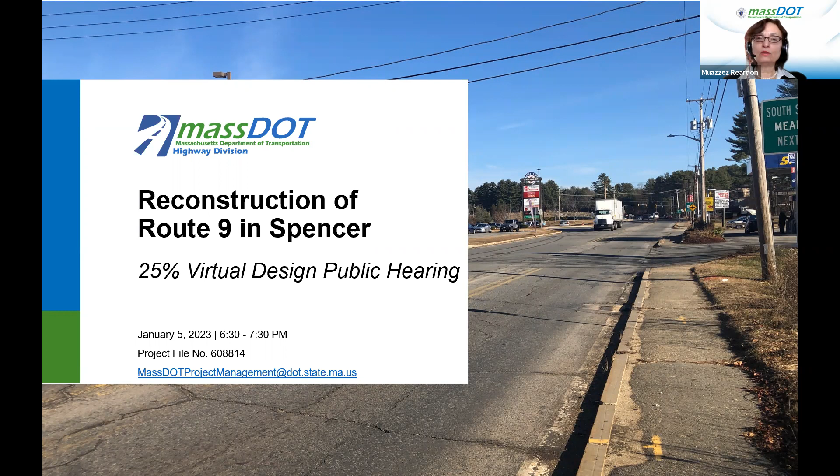The notice of the design public hearing appeared in the Telegram and Gazette on December 22nd, 2022 and December 29th, 2022, and the Stonebridge Press on December 23rd, 2022 and December 30th, 2022. A copy of this notice will be attached in the final hearing transcript. The hearing was advertised on MassDOT's social media. Notice and flyer also posted on MassDOT website on December 12th, 2022.

We are currently at the 25% design stage for the resurfacing and related work on Route 9 project, which means that the plans are still being developed and we welcome your feedback.

Estimated total project cost is about $10 million, which will come from federal aid funding with Federal Highway Administration funding 80% of the total construction cost. MassDOT funds the remaining 20%. This project must be programmed in the statewide transportation improvement program in the appropriate federal fiscal year in order for MassDOT to solicit bids for eventual construction. The total estimated cost of the project does not include any right-of-way acquisition costs.

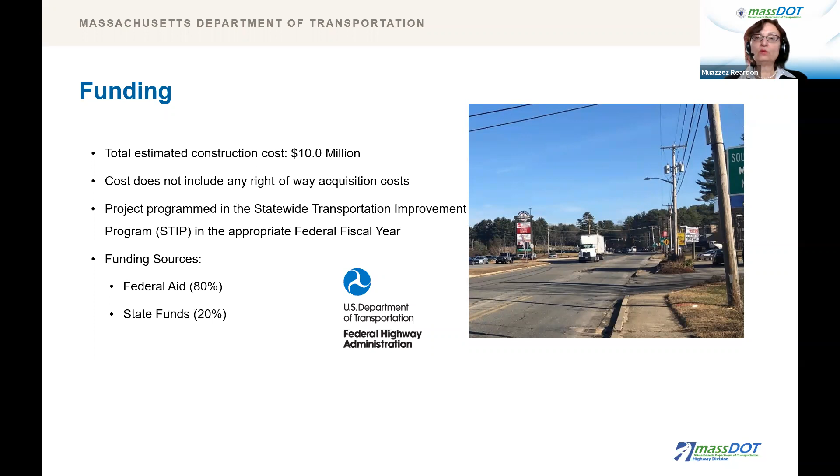The design is expected to be completed in the summer of 2024. Construction is expected to be completed within 24 months after the notice to proceed.

The project we will be presenting today is the resurfacing and related work on Route 9 project. This slide provides an overview of the topics that will be discussed during this presentation.

As you may be aware, the reason for the project is to improve existing roadway condition, reduce traffic congestion, complete missing links for pedestrians and bicycles, improve safety for all users, improve pavement markings and signage, improve existing pavement conditions, and improve stormwater collection and treatment.

Please keep in mind that the project we are presenting is still in the design stage. The plans are still being developed and we welcome your feedback. All your questions and comments will be taken into consideration as the project's design advances.

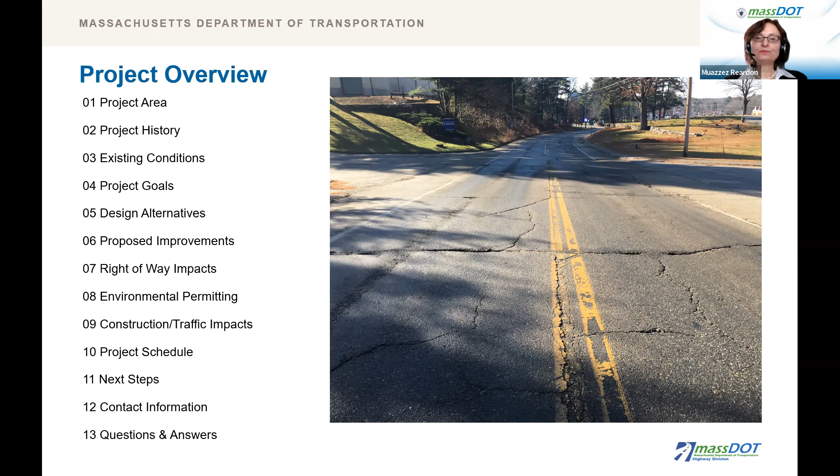Here we see the limits of the project. The project includes reconstruction of approximately 1 mile of Route 9 from just east of the Route 49 intersection to just west of the Water Street and Summer Street intersection.

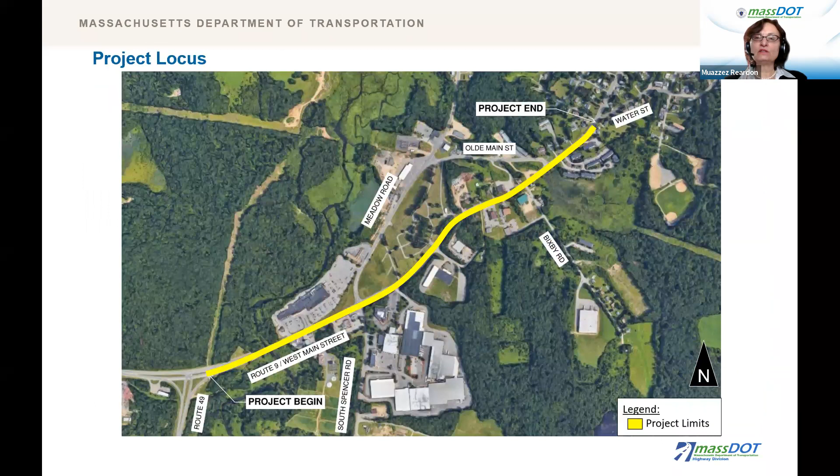The project was initiated in March of 2017 and approved by the MassDOT Project Review Committee within a month. The consultant completed an alternatives analysis in October of 2020. 25% design was submitted to MassDOT in August of 2021. Revised 25% design submitted to MassDOT in April of 2022, which brings us to the design public hearing tonight.

Now, Dimitrios Makos, District 3, will explain why this project was initiated. Thank you, Muazzez. Why was this project initiated?

This project was initiated to improve and upgrade multiple existing deficiencies identified throughout the project corridor. Here we have a list of the existing conditions and deficiencies that exist on this section of Route 9 that I will be talking about.

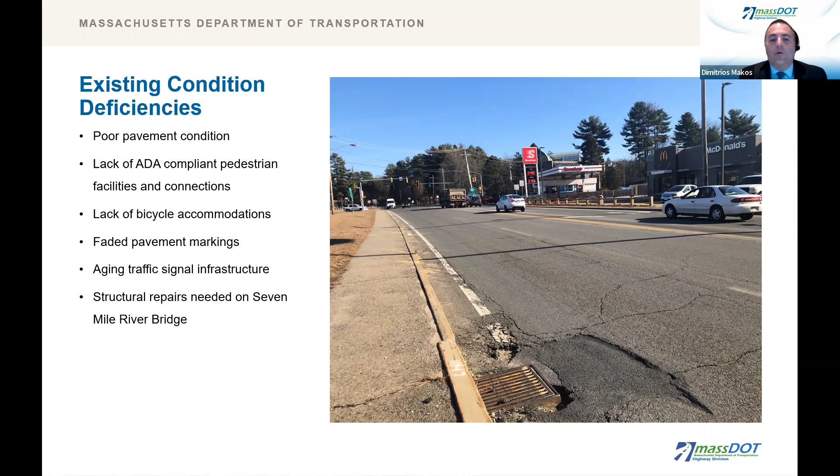The roadway pavement is in poor condition with large cracks in many areas. There is a lack of Americans with Disabilities Act, or ADA, compliant pedestrian facilities. Sections of the corridor, such as in front of the Spencer Fair Shopping Plaza, do not have a sidewalk. The existing pedestrian ramps do not meet ADA standards. There's also a lack of bicycle accommodations, specifically in the area of the Spencer Fair Shopping Plaza. Pavement markings are faded and signal equipment is outdated. Bridge inspection has shown that structural repairs are needed on the Seven Mile River Bridge.

In the picture on the left, we have an example of the large, deep cracks within the roadway which exists throughout the project corridor. The picture on the right shows the existing traffic signals at the intersection of Meadow Road and Route 9 that need updating. The traffic signal backplates have broken apart.

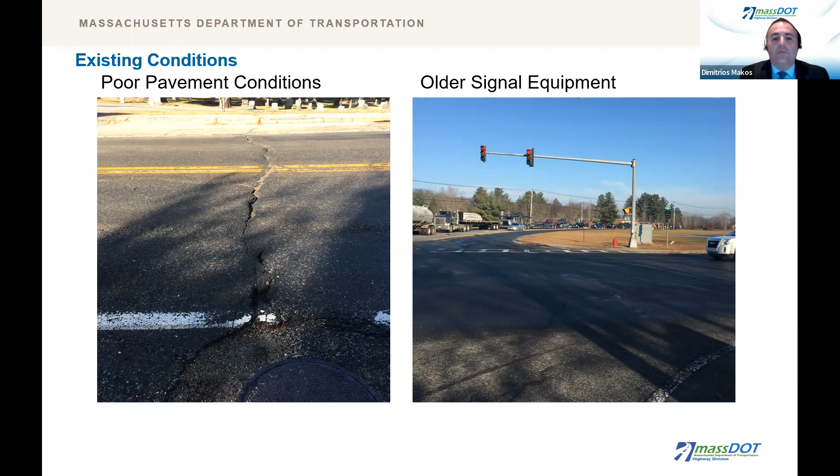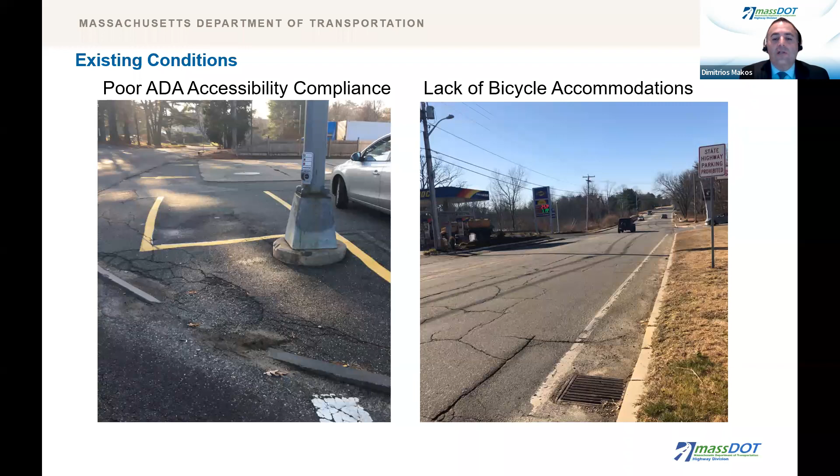The picture on the left is an example of a pedestrian ramp at the Route 9 and South Spencer Road intersection, which does not meet ADA accessibility standards. The picture on the right shows the lack of bicycle facilities in front of the Spencer Fair Shopping Plaza.

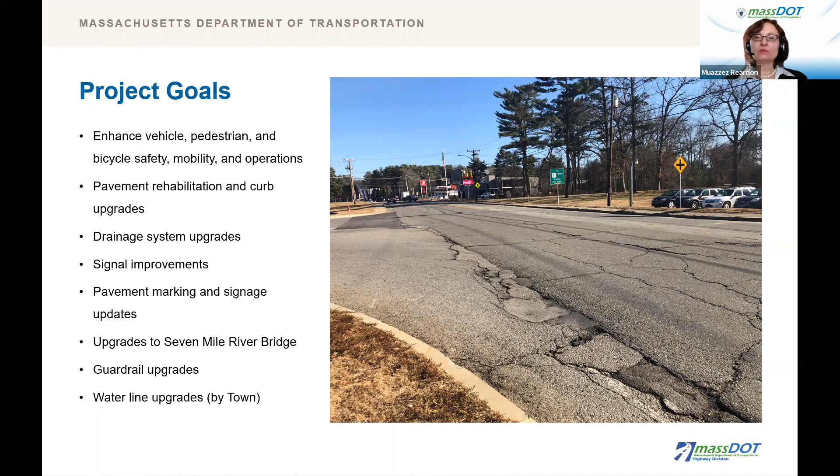Next, we will discuss the different cross-sectional alternatives that were considered for this project. Three cross-sectional alternatives were reviewed and considered. Each alternative was reviewed in terms of whether it meets the project goals, right-of-way and environmental impacts, costs, safety benefits, and whether it meets current design standards.

Alternative 1 is shown here, which contains a 10-foot wide shared use path on one side of the roadway, a 5-foot wide grass strip buffer area, 4-foot wide shoulders, and two 11-foot travel lanes.

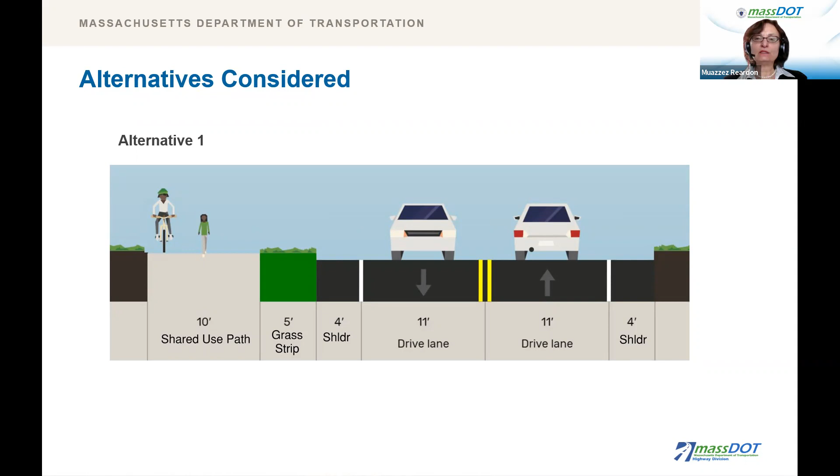Alternative 2 includes sidewalks on each side of the roadway, 5-foot wide bicycle lanes, and two 11-foot travel lanes. Alternative 3 includes sidewalks on each side of the roadway, 5-foot wide bicycle lanes with 2-foot buffer, and 11-foot travel lanes. It should be noted that a two-way left turn lane was also included in the review of each alternative for the section of Route 9 in front of the Spencer Fair Shopping Plaza.

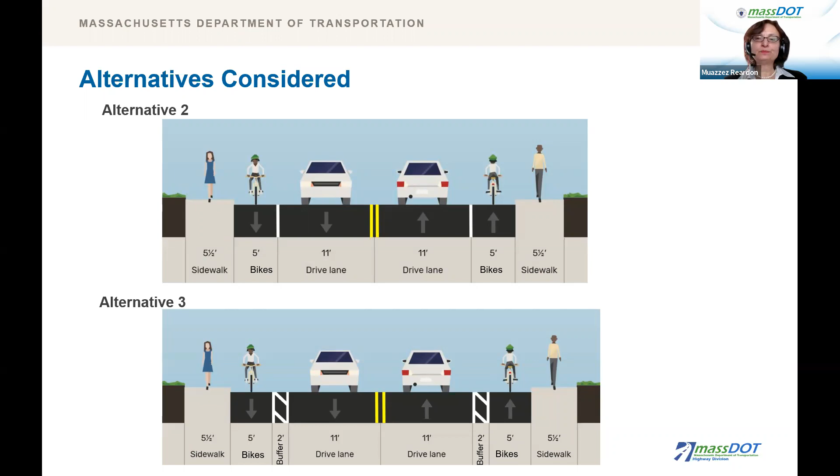Next, we will discuss what the preferred alternative is. Upon review of each alternative, the preferred cross-section was Alternative 3, which consists of 5.5-foot sidewalks on each side, 5-foot bicycle lanes with 2-foot buffers for the majority of the corridor, and 11-foot travel lanes. It was determined this cross-section most effectively meets the goals of the project while limiting right-of-way impacts, environmental impacts, and costs.

As shown on the bottom of this slide, the cross-section in front of the Spencer Fair Shopping Plaza contains a two-way left turn lane as well. Please note, this is just a typical section, and there will be areas of constraint where this will differ slightly.

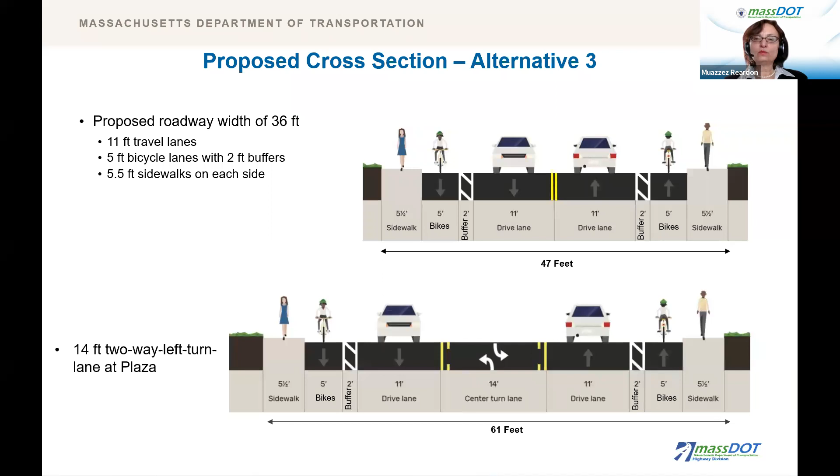Now we will review the proposed plans and improvements, starting from the western project limits and moving eastbound. Due to the poor condition of the existing pavement, full depth pavement construction is proposed for a majority of the corridor. The existing vertical and horizontal roadway alignment is generally being maintained. New pavement markings and signage are proposed throughout the corridor. New catch basins and drainage manholes are proposed where necessary to improve existing drainage and water quality.

Here we see the western limits of the project, just east of the Route 49 intersection. In the westbound direction, the buffered bike lane will meet the existing 5-foot shoulder to provide connectivity to existing conditions. The second westbound travel lane is introduced, and the sidewalk on the north side of Route 9 begins at Bemis Memorial Park.

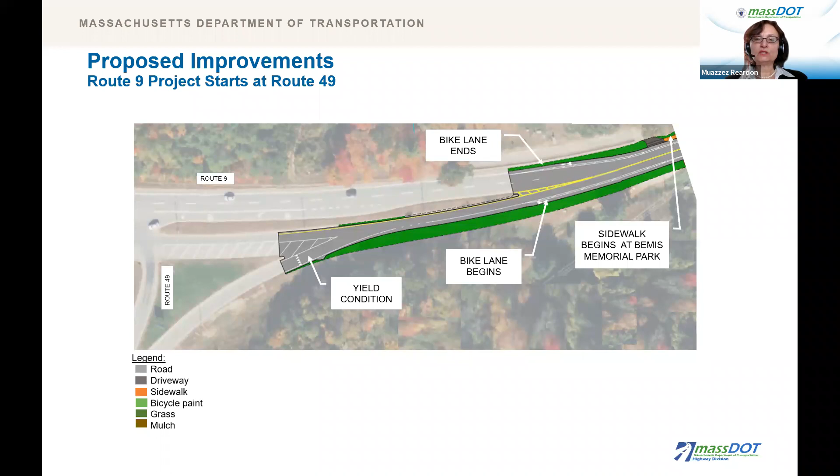In the eastbound direction, the roadway is narrowed and a yield condition is introduced for vehicles turning right from Route 49. The existing water main along Route 9 will also be upgraded from the western project limits to the intersection of Route 9 at South Spencer Road.

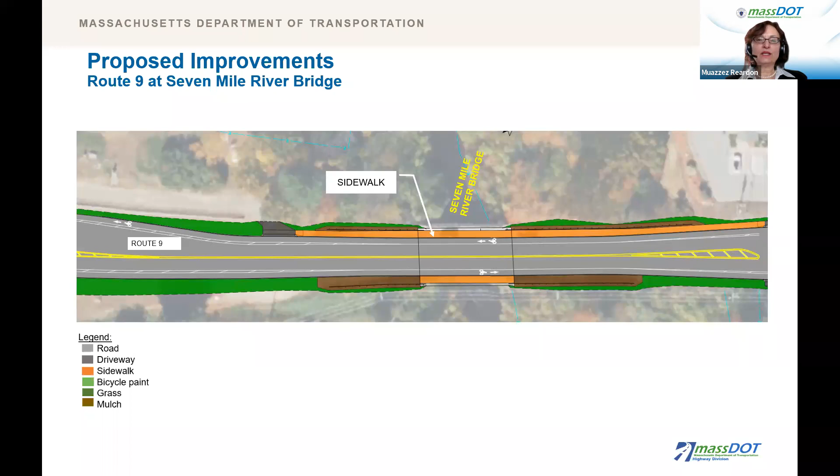Here we see the proposed improvements at the 7 Mile River Bridge. Based upon bridge inspection, structural steel repairs are proposed at this bridge. The bridge rail and guardrail approaching the bridge will also be upgraded.

Moving eastbound, we see the proposed improvements in front of the Spencer Fair Shopping Plaza. The two-way left turn lane is proposed to replace the second westbound travel lane to improve traffic operations and connectivity to the existing businesses along this stretch of roadway.

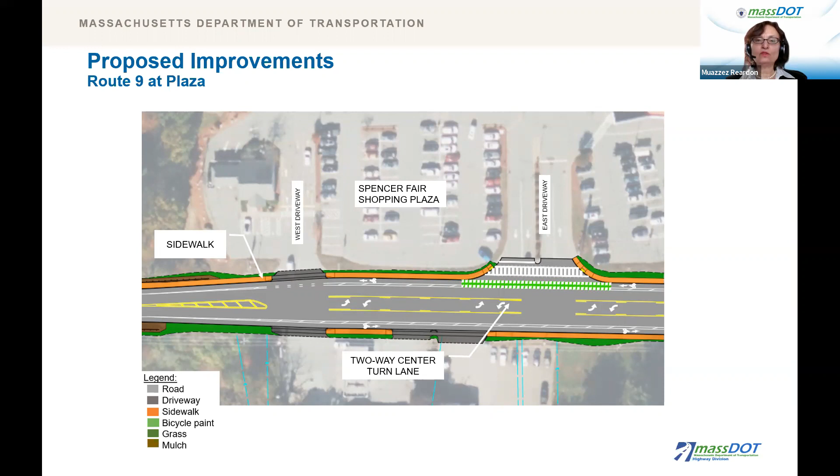High visibility crosswalks and bike lane markings are proposed to improve safety for pedestrians and bicycles at high conflict crossing areas throughout the project limits.

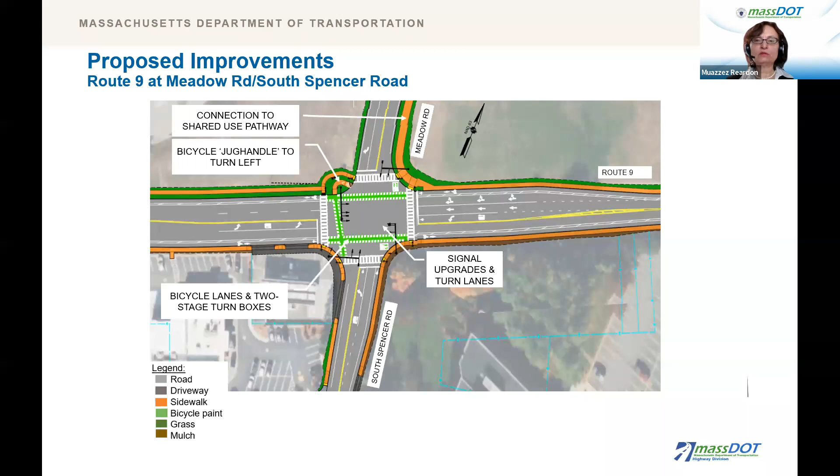A shared use path is proposed along the east side of Meadow Road and will provide connectivity to the adjacent shared use path proposed as part of MassDOT's Meadow Road project. Utility poles will be upgraded to taller poles at this intersection to eliminate conflicts between the mast arms and overhead wires.

Here we see the intersection of Route 9 at Olde Main Street. ADA compliant pedestrian ramps and high visibility crosswalks and bicycle crossing markings are being proposed. A crosswalk is proposed across Route 9 just east of the intersection to provide connectivity from the south side of Route 9 to Olde Main Street.

The existing guardrail will also be upgraded at this intersection. The emergency preemption signal for the Spencer Fire and Police departments will be upgraded as part of this project.

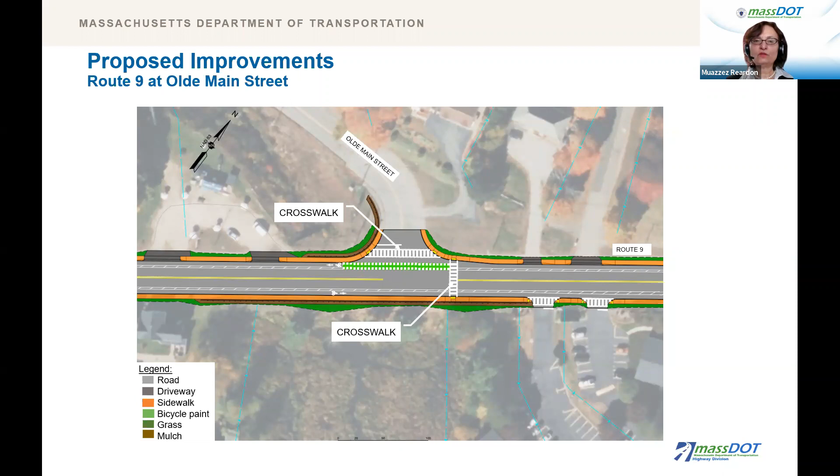Here we see the eastern project limits tying into existing conditions just west of the Route 9 at Water Street and Summer Street intersection. The bike buffers transition to meet the existing shoulders, which will provide continuity of the bike lanes. This concludes my presentation on the proposed design plans.

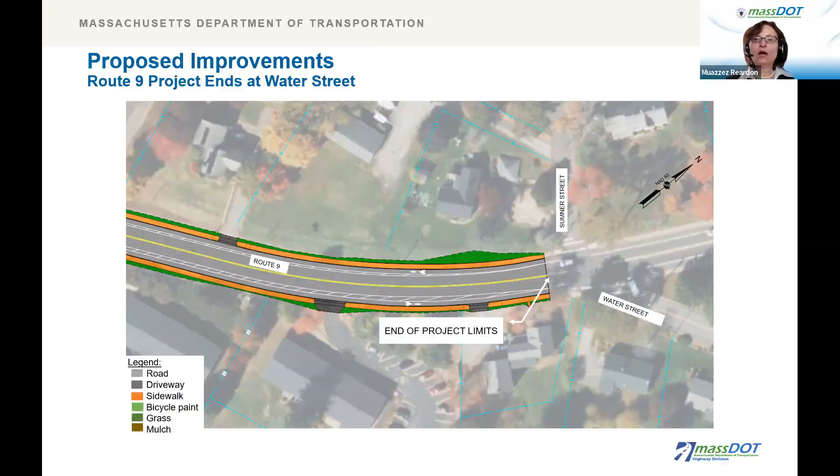Now I would like to turn the presentation over to Melissa O'Day, representing MassDOT's Right-of-Way Bureau, to discuss the right-of-way procedures. Thank you, Muazzez. Good evening. My name is Melissa O'Day, and I represent the Right-of-Way Bureau of the Massachusetts Department of Transportation Highway Division.

The Right-of-Way Bureau is responsible for acquiring all the necessary rights in private and public lands for design, construction, and implementation of this project. Affected property owners will be contacted by personnel from the Right-of-Way Bureau or consultants representing the Massachusetts Department of Transportation Highway Division.

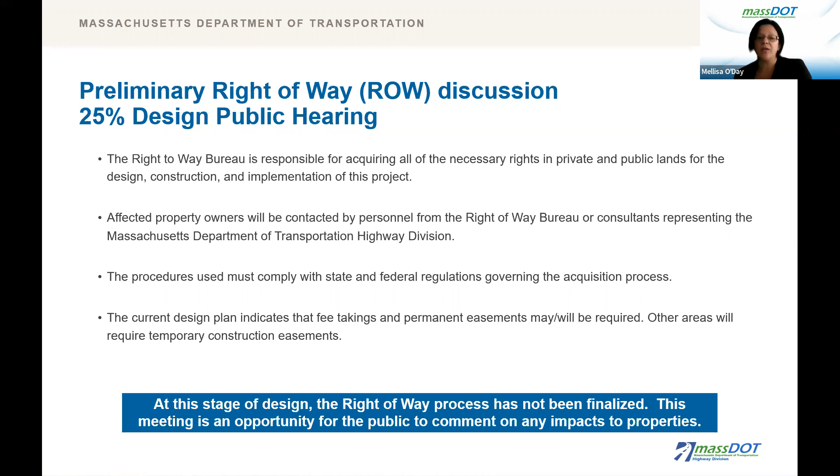The procedures must comply with state and federal regulations governing the acquisition process. The current design plan indicates that fee takings and permanent easements may or will be required. Other areas will require temporary construction easements.

I will be happy to answer any general questions regarding the right-of-way activities during the open forum questions, and I will be available after this public hearing for any specific questions that you may have.

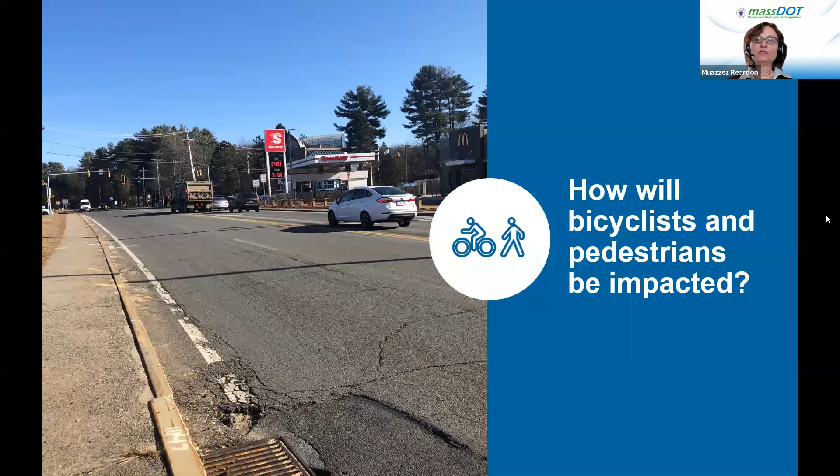How will bicyclists and pedestrians be impacted? As discussed previously, pedestrians and bicycles will be accommodated with the sidewalks and bike lanes on each side of the roadway for the majority of the project corridor.

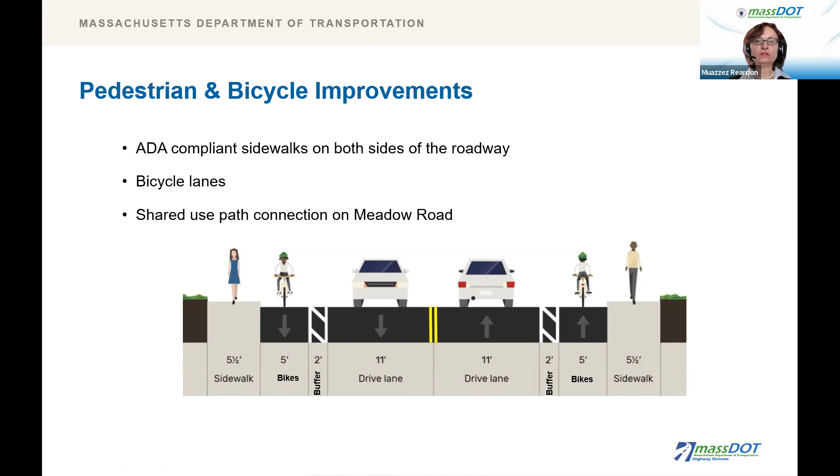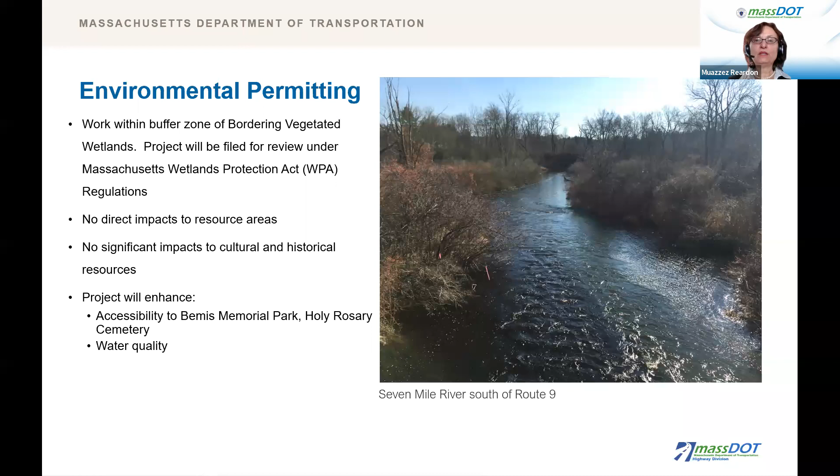Environmental impacts: there are minimal environmental impacts at this time. As the project advances, any impacts identified will be reviewed by the appropriate agencies. The town and its residents will be notified and engaged throughout the permitting process.

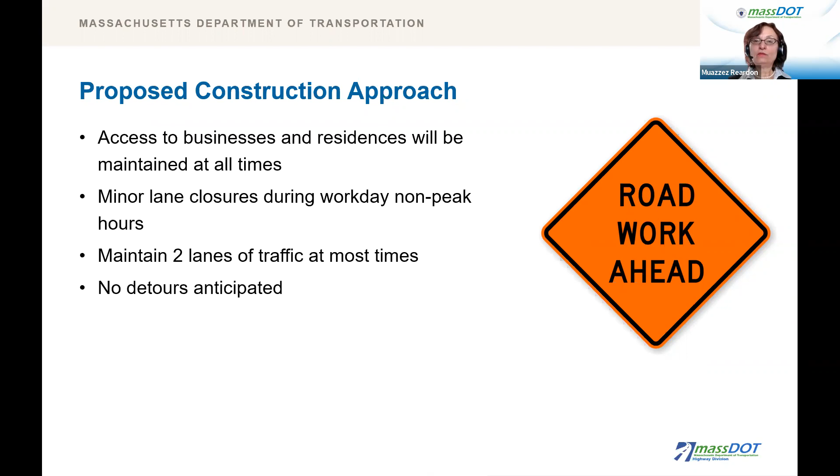Next, we will discuss the proposed construction approach. During construction, the contractor will be required to maintain access to all businesses and residences at all times. Minor lane closures will be required and will take place during workday, non-peak hours to minimize inconvenience to the public. It is anticipated that 2 lanes of traffic will be maintained at most times during construction. At this time, no detours are anticipated.

After this design public hearing, we will work on the environmental permits and 75% design and right-of-way submittal, which we anticipate to be submitted in the winter of 2023. Following that, the design will be finalized and right-of-way secured. The design is expected to be advertised and bid in late 2024.